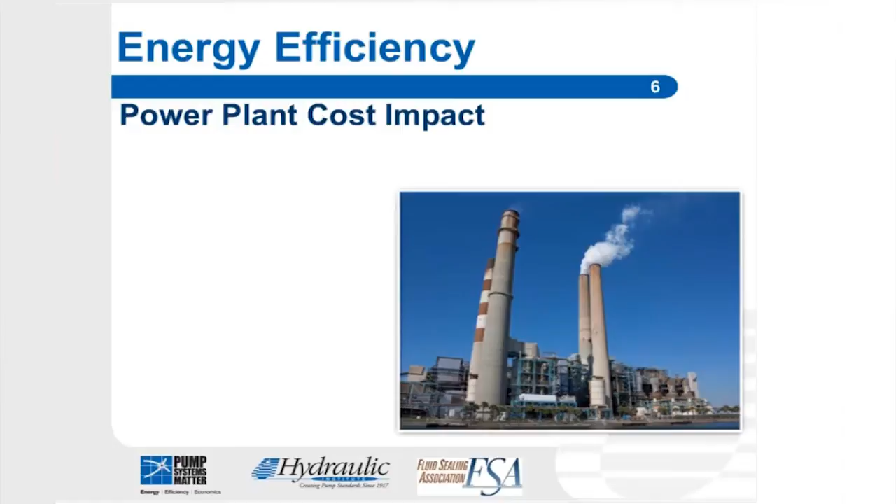In a power plant, most conventional power plants are fired by fuels such as coal, gas, or oil. We burn this fuel to create heat, and in the majority of instances to create steam, to turn turbines and create electricity. So energy can be in the form of heat or thermal energy.

If we look at a typical power plant producing electricity, it uses water in a closed-loop system. The water is at various energy states around that system. So the water could have a high energy state being feed water or steam, or a slightly lower energy state being a condensate. Any of this water in the closed-loop system that has to be replenished has to be heated up.

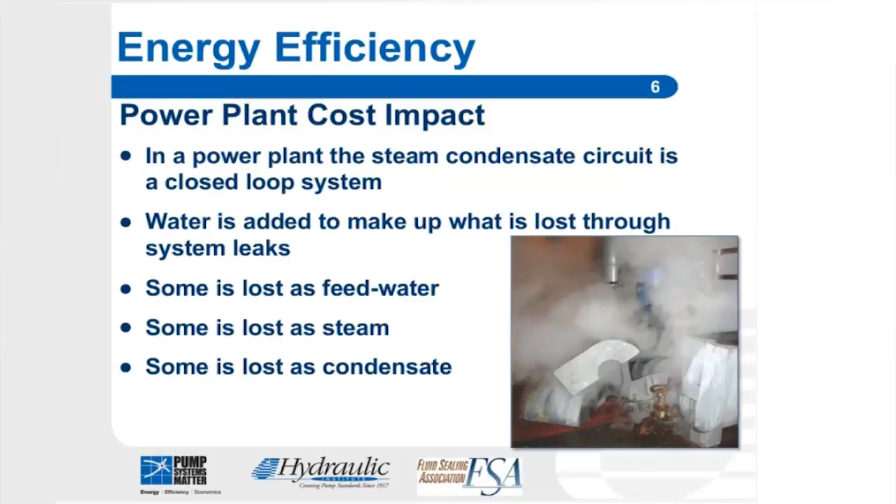So if we're leaking this water with high energy content through valves, valve stems, steam traps, pump seals, or flanges, this will have to be made up in what's known as make-up water. Typically the make-up water would be at a low energy state, a low temperature.

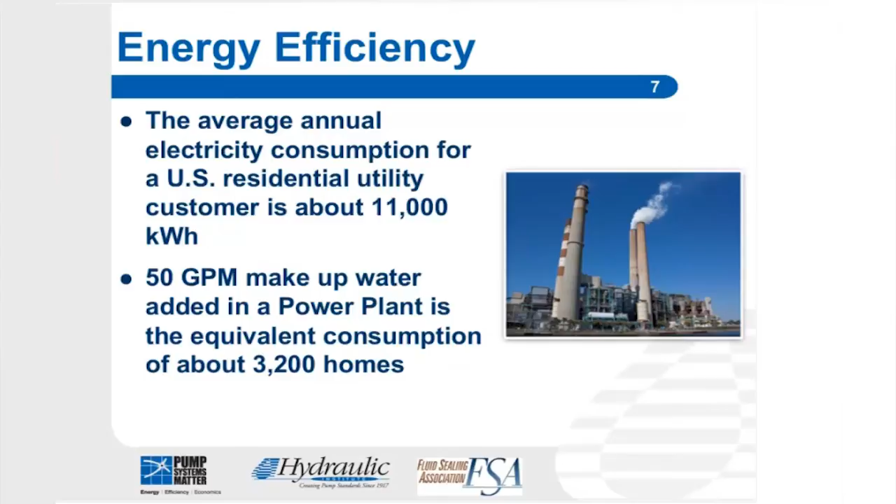There was a calculation done by a friend of mine who's in the Fluid Sealing Association. He made the assumption that if 50 gallons per minute of water is lost throughout that closed-loop circuit, to make up that water and heat it to the same energy state, the equivalent energy requirement would be that of 3,200 homes in North America. So thermal energy has a significant impact on plant efficiency.

Another example I'll state here is an evaporation process. You find evaporation processes in many industries. In the paper industry, lignin is extracted from the wood or lumber and turned into a liquor called black liquor. The black liquor is evaporated to drive off all the moisture content and is then used to fire the boilers, which in turn create the heat for the paper making process.

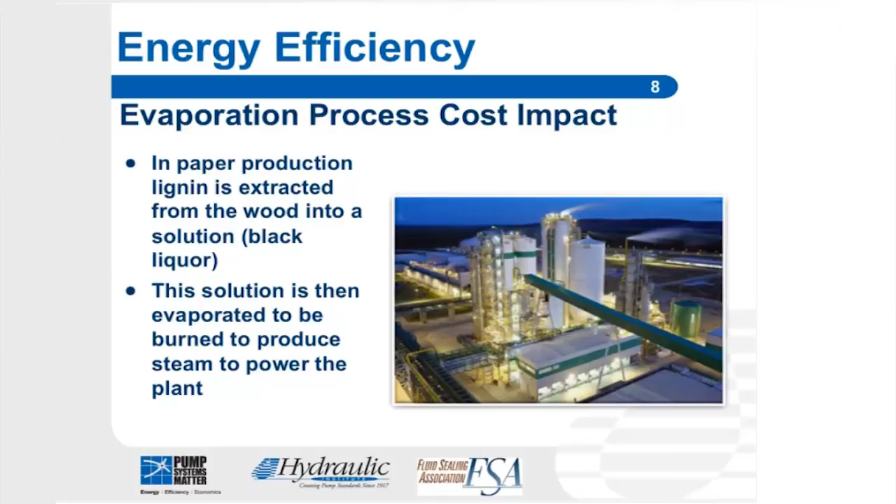Now this black liquor is pumped around, and I'm going to give a very clear example here of where the problems start arising. So I've got an evaporator here where I'm trying to drive off the moisture. I'm applying heat, probably pulling vacuum in the evaporator. And I've got a pump that's pumping liquid, either circulating it or feeding the evaporator, with a seal in here.

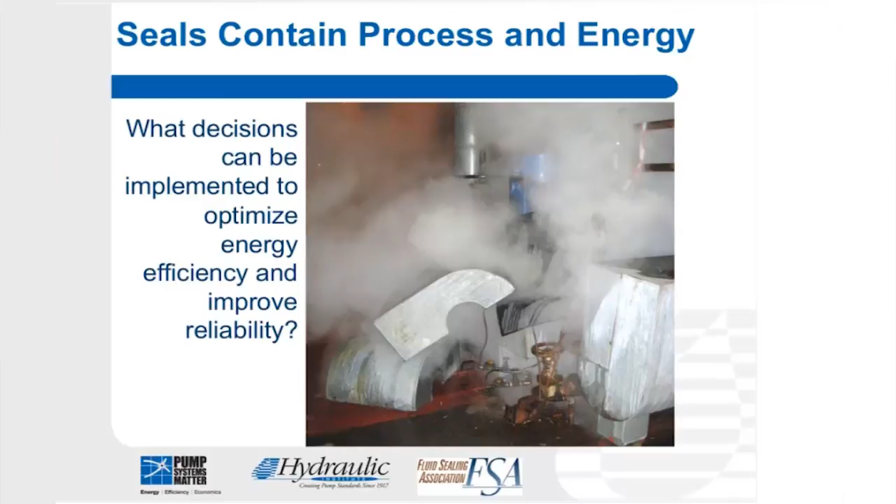If I'm injecting cold, clean water into this evaporator, I'm actually trying to cool down the evaporator. The volume of cold liquid going into that evaporator through the seal flush point here can have a significant impact on evaporator efficiency, which we'll look at further on in this presentation in more detail. So we can make decisions and implement things to optimize energy efficiency and improve reliability by having greater knowledge and improved understanding of the impact of these seal flushes that we use.

I think the concept we need to start coming across in the seal industry - we always talk about sealing the process fluid, be it toxic or expensive. We try to keep it within the system, within the pipework, and stop it leaking out to avoid the cost of waste. But if that liquid is leaking, and the liquid is heated, we're actually sealing the heat energy of the process too. So be it through flanges, valve stems, or pump seals, we must start thinking that seals contain the process, but we're also containing energy within the system.

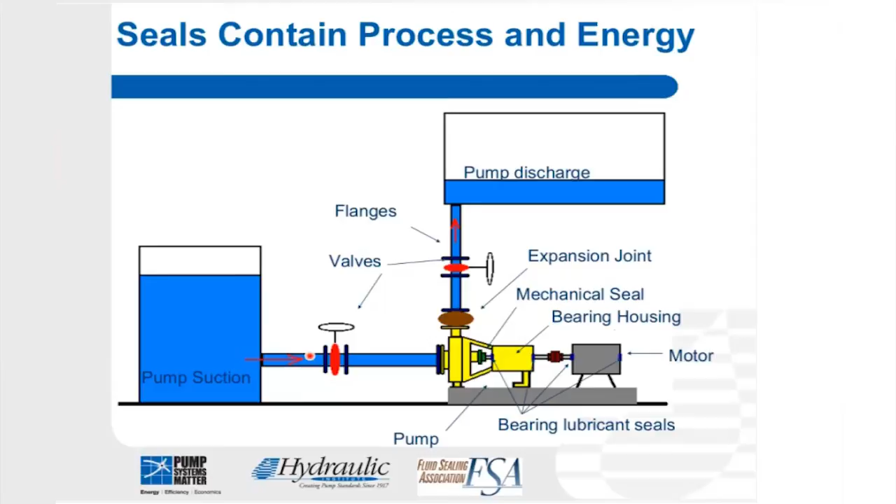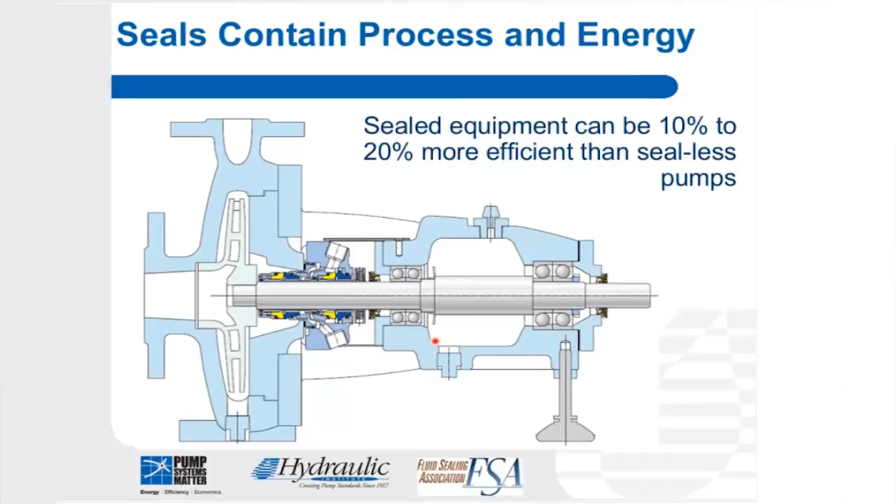There's quite a lot of discussion on shaft sealing and the different methodologies of shaft sealing and what impact that has on the driven power of a pump, and certainly coupled pumps using some sealing mechanism are more efficient than sealless pumps that have losses through the magnetic coupling. There's a lot of discussion in the industry about optimization of pump hydraulics and variable speed drives and other improvements. However, the thermal inefficiencies of some sealing systems and some sealing flush plans can far exceed the energy savings from hydraulic optimization.

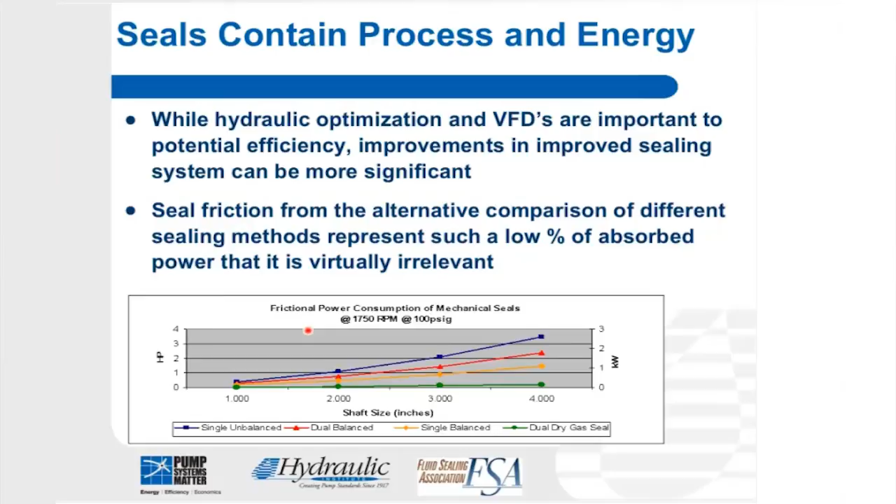But when you walk around the offices, you are bombarded with posters asking all the employees to save energy, turning off their laptops at night or turning off their phone chargers at night. In the grand scheme of things, the futility of turning off those small apparatus is nothing in comparison to the thermal inefficiencies that you find in process plants around the world.

The focus area I'm talking about is on the thermal inefficiency of a seal flush or a seal piping plan or a seal auxiliary system, or whatever we want to call it. The frictional power consumption of a seal is relatively low in comparison.

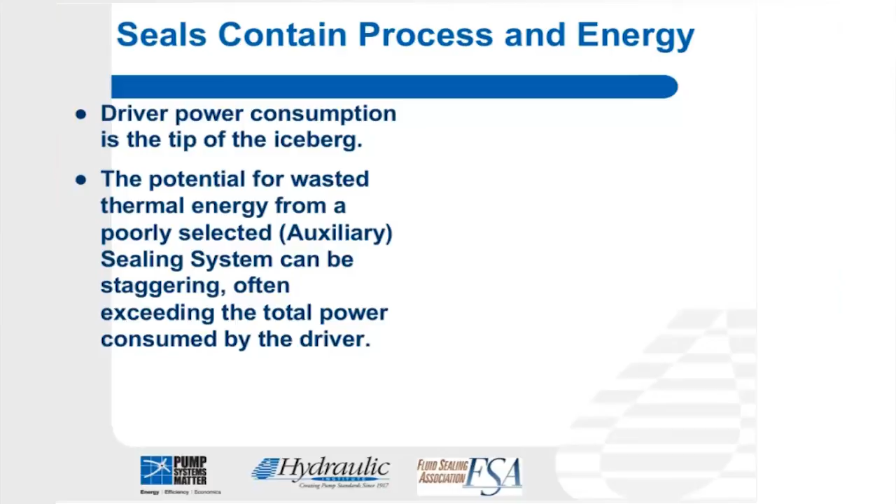I'm going to make an analogy here with, that's a European car, a French vehicle, and in Europe it was the first vehicle meant to exceed 1,000 horsepower and travel at over 200 miles per hour, a road legal vehicle. If you have a few million dollars, you can go out and buy one of these things. Now, when the manufacturers claimed it was 1,000 horsepower, of course they were talking about metric horsepower, which is not the same as brake horsepower, but of course it's French, so we have to work in metric. And the claim that it's a 1,000 horsepower vehicle is not quite correct.

The actual engine within that vehicle produced over 4,000 horsepower. But what we look at is actually the horsepower that turns the rear wheels, that spins the prop shaft. That is a mere 1,000 horsepower. The other 3,000 horsepower was wasted energy exiting through the muffler, up the exhaust system, and it had something like 10 radiators hanging around this car to cool the engine, the gearboxes, etc. So 3/4 of the power produced by this vehicle is wasted thermal energy, and only 1/4 of the power is actually used to drive the vehicle down the road.

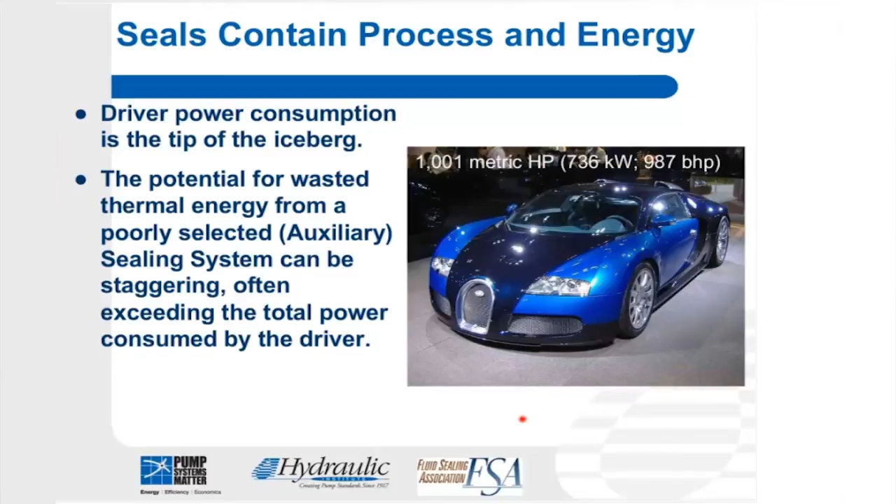So when we have sealing devices in pumping equipment, we use things which we call flush plans or auxiliary sealing systems, or some people might know them as API plans. Why do we use them?

Again, I'm going to use another analogy. In my country, the United Kingdom, we have quite a cold climate, we're at a high latitude, 51 degrees north. Here's a picture of a glass house in London where we grow tropical plants. We can grow them in our harsh climate because we change the environment that they live in, and we keep them in this enclosure, which allows them to flourish.

Now, mechanical seals and sealing systems on pumps are probably the most delicate component on a pump, and they're again like delicate little tropical flowers. We use seal flush plans, or API piping plans, or sealing systems to change the environment that our seals are operating in, and that makes the seals flourish and provide reliable longevity in operation.

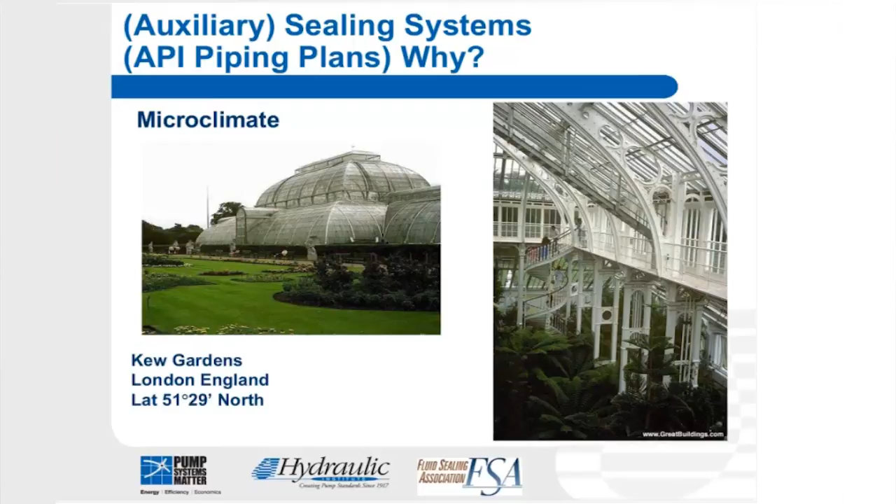So flush plans are normally used to change the environment of a seal. These flush plans are formalized by the American Petroleum Institute in their standard API 682, which is the custodian of the flush plans, drawn in there as standardized formats. If you want to learn more about these flush plans, how they're used and operated, there's an excellent tutorial in a Hydraulic Institute publication, Mechanical Seals for Pumps Application Guidelines, in Chapter 20, a very recommended read for anyone who wants to learn more.

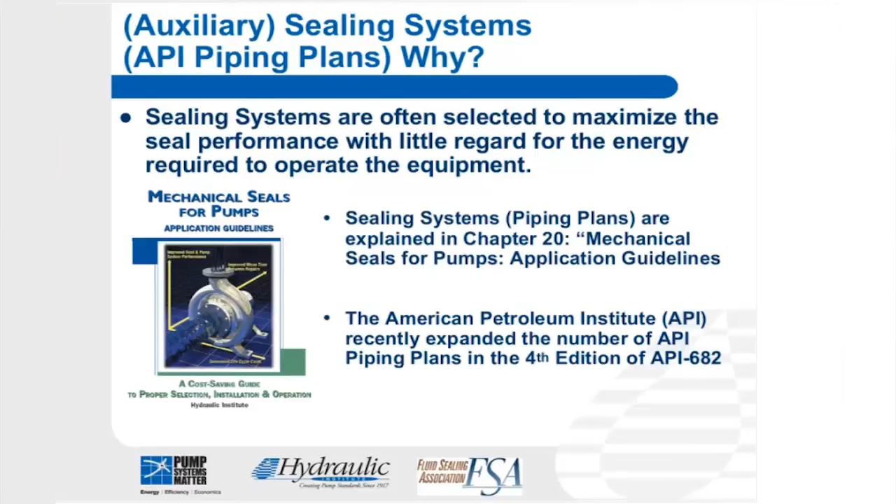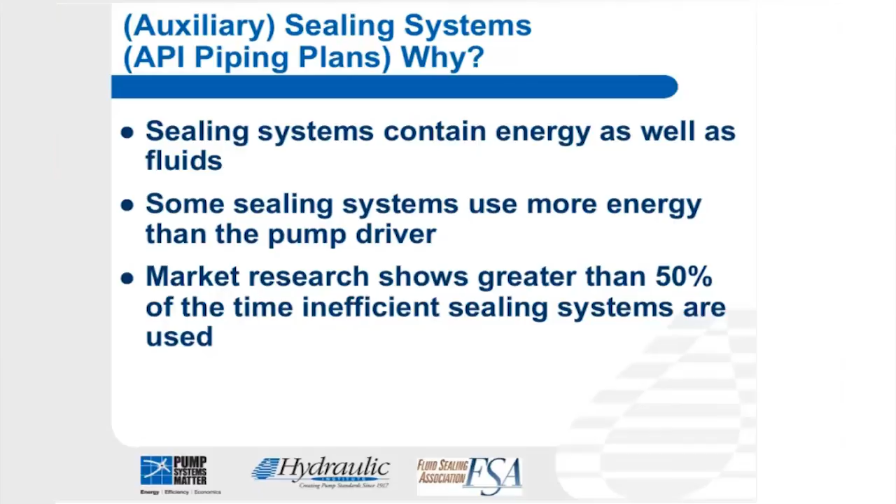Sealing systems contain energy as well as fluids. Some sealing systems will use more energy than the pump driver. Market research carried out by the Fluid Sealing Association has illustrated that inefficient sealing systems are regularly used. Where are these inefficiencies? Where do they come in from? Where do we find them?

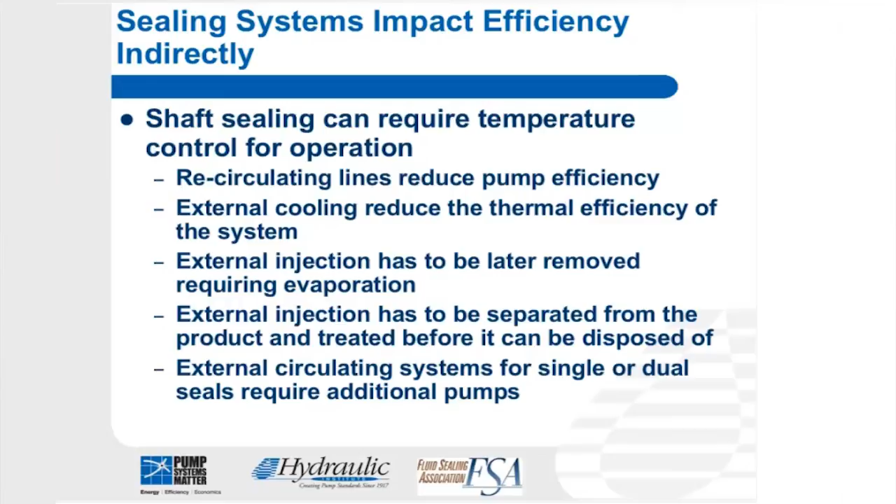If you look at recirculation lines in seal flushes, they can reduce the efficiency of a pump. External cooling can reduce the thermal efficiency of a process. External injection that may have to be later removed by processes such as evaporation can be extremely expensive. Externally injected flush fluids may contaminate the process fluid and have to be separated further downstream and then treated before disposal. External circulating systems for dual seals will require some sort of mechanism to circulate them, maybe pumps. These are all potential inefficiencies that we see with flush plans.

The plans are numbered, as I said earlier, formalized, and the numbering system - don't ask me how to explain the numbering system. It doesn't seem to really follow any logic. But then, flush plans...

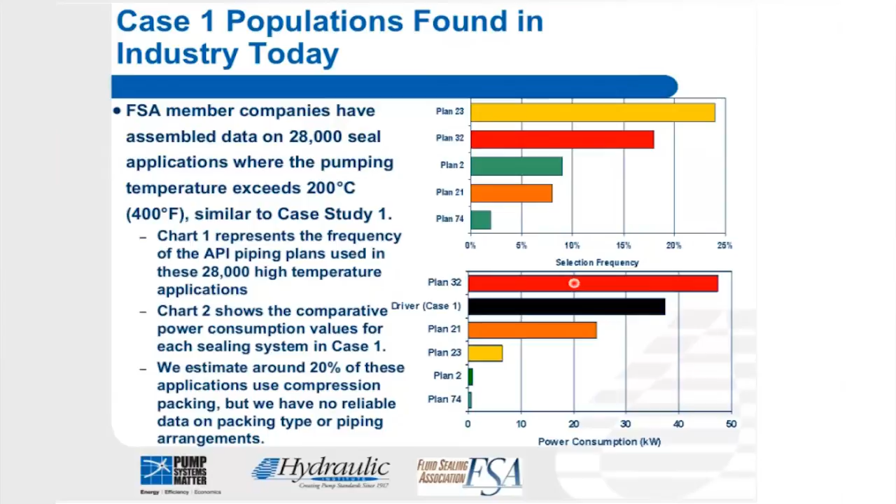So, can we summarize between the API plans which ones are used for single seals, which ones are used for dual seals? These are the questions that, if you want to have an impact, you have to have an understanding of the piping plans.

What do the plans really do? How do they control the environment? Again, knowledge is power here, and reading and understanding the flush plans is critical if you want to make an impact on thermal efficiency or energy efficiency in seal systems.

How many plan options are there? Which ones do we choose? Are there new plans? Have they been adopted? Well, currently API 682 is in its 3rd edition, and there are some 28 current plans. The 4th edition of the standard is imminent, due for publication, and there's an additional 5 plans in the new edition of API 682. So there's over 30 plans to choose from.

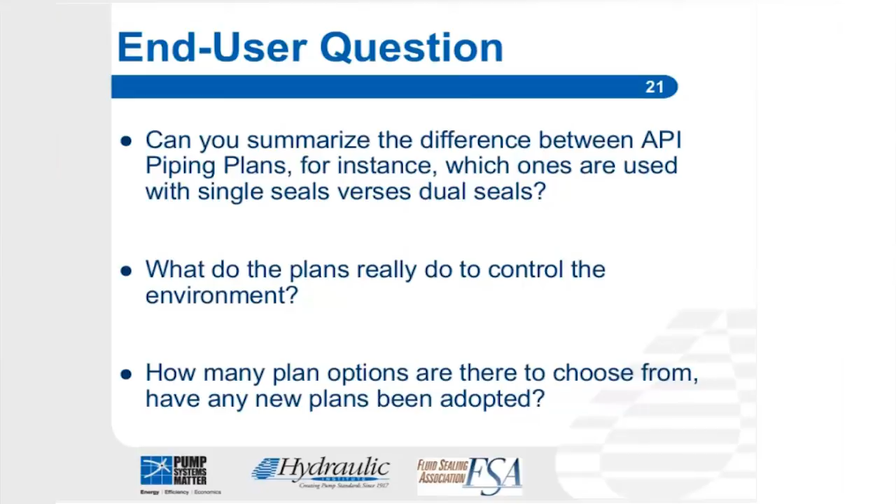We're going to look at some studies of different piping plans. These studies were undertaken by members of the Fluid Sealing Association, and we're going to compare them with a hypothetical case study. The piping plans we're going to look at in detail are Plan 21, Plan 23, Plan 32, Plan 62. We're also going to look at some dual seal piping plans, Plan 53A and Plan 54.

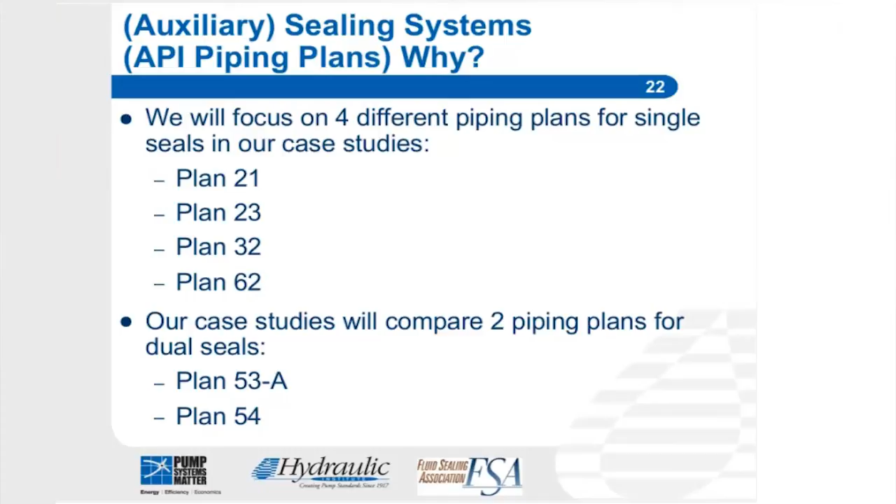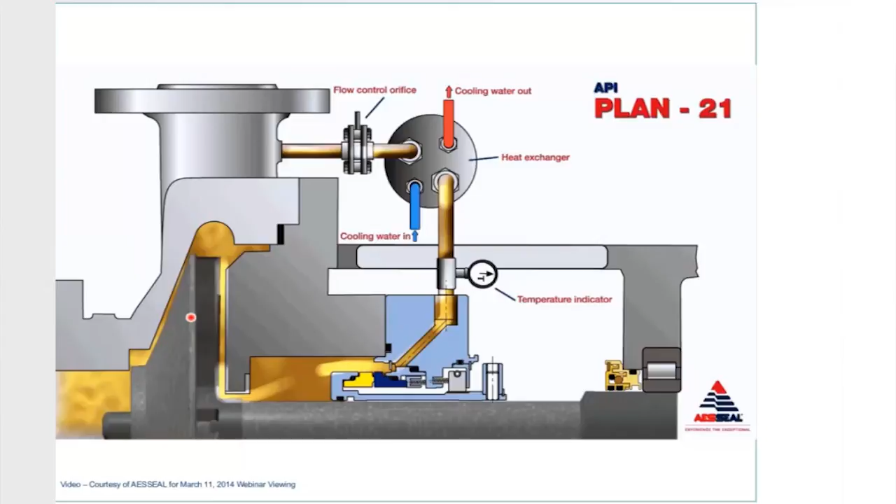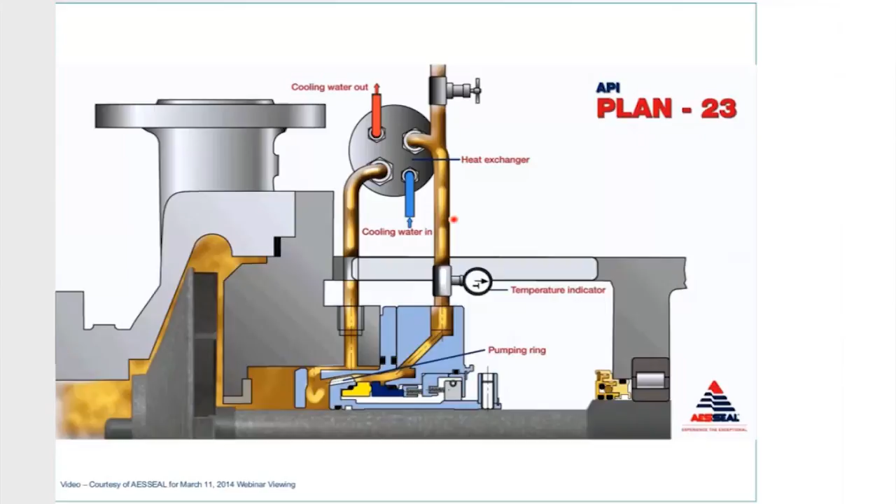By comparison, this is Plan 23, which is a closed loop cooling system. Again, we have our hot process going from suction to discharge on this pump. The seal chamber is closed down by some throat bushing at the neck of the seal chamber. Within the seal chamber, we have a secondary, very small impeller to circulate liquid locally through a cooler or heat exchanger. This Plan 23 is significantly more efficient than Plan 21, because we're only really trying to remove the generated heat from the seal faces and any heat soak through the pump casing, as opposed to Plan 21, where we're trying to cool down the process continuously.

Normally the cold, clean liquid would be significantly cooler than the process fluid, and we're effectively diluting the process with cold liquid, which can have a very significant impact on the thermal efficiency of the process.

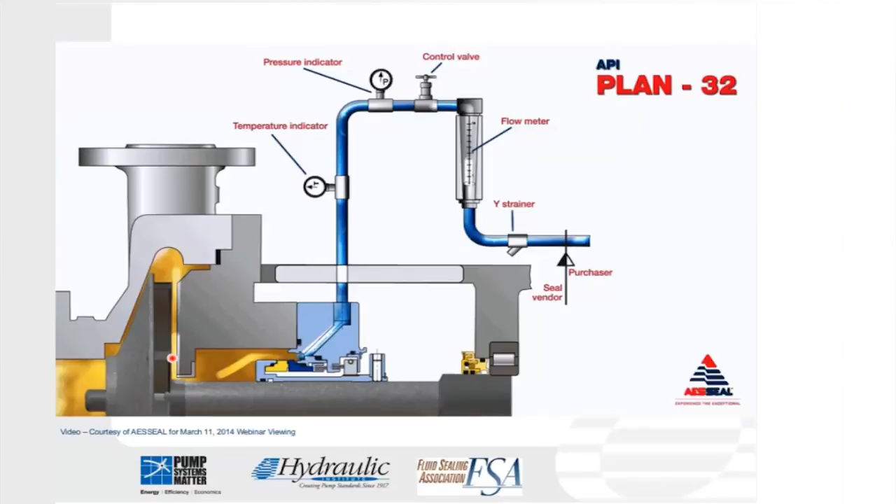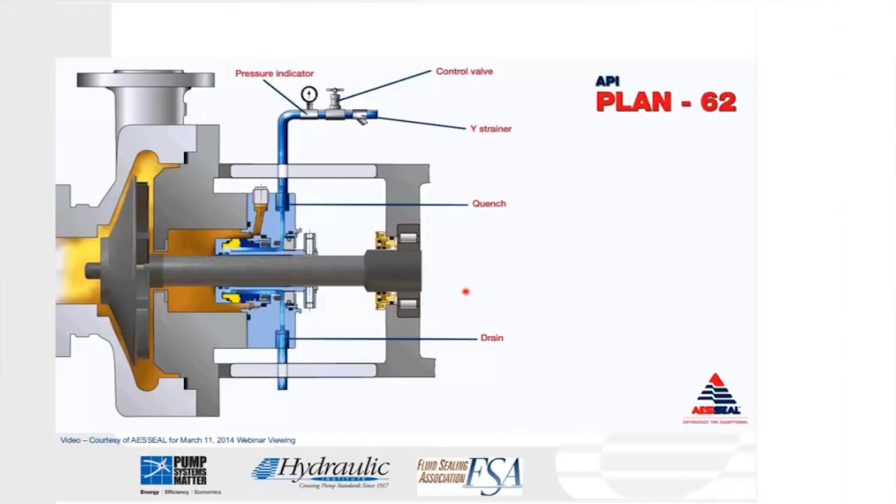Plan 62 is an atmospheric plan commonly used on hot oil type applications for a single seal. What we do with a Plan 62 is take steam across the atmospheric side of the seal and down to some drains system. What the steam does is not really used for cooling. What it's used for is to carry away any hydrocarbon particles that congeal on the atmospheric side of the face, before they start carbonizing and causing the seal faces and the seal to hang up.

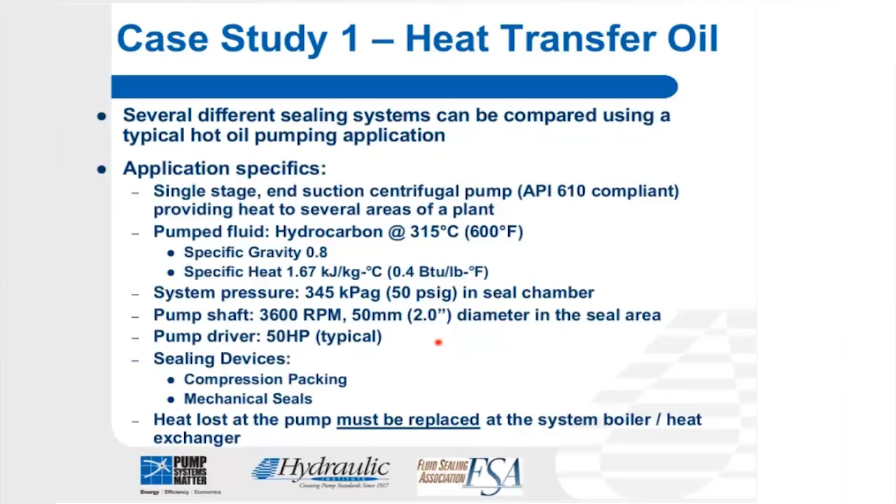The case study I'm going to review is a hypothetical example developed by a member of the Fluid Sealing Association. He's looked at a simple example of an API 610 end suction pump, an OH2 pump. Pump fluid would be at 600 degrees F. We're talking about a heat transfer type oil to circulate heat around a plant, and we're assuming that the seal chamber is at 50 psi and the seal diameter is 2 inches. Typically a pump such as this would use a 50 horsepower motor, which is around 35 kilowatts.

So we look at this example with a Plan 21. As I said before, we're taking the side stream from the process through the cooler and injecting once through the cooler, back to the process. Because we're cooling the process continuously, the heat load is very significant on the cooler. The only thing controlling the flow is the orifice plate, and if we do a simple orifice plate calculation across the pump, typically you see between 2 and 3 gallons per minute of flow rate through the cooler.

The cooler works very hard, and in this particular example, the cooler is removing 37 kilowatts of heat, or 127,000 BTUs per hour of heat from the process, as opposed to the friction value of the seal, which is a few hundred watts. So a very significant load on the cooler.

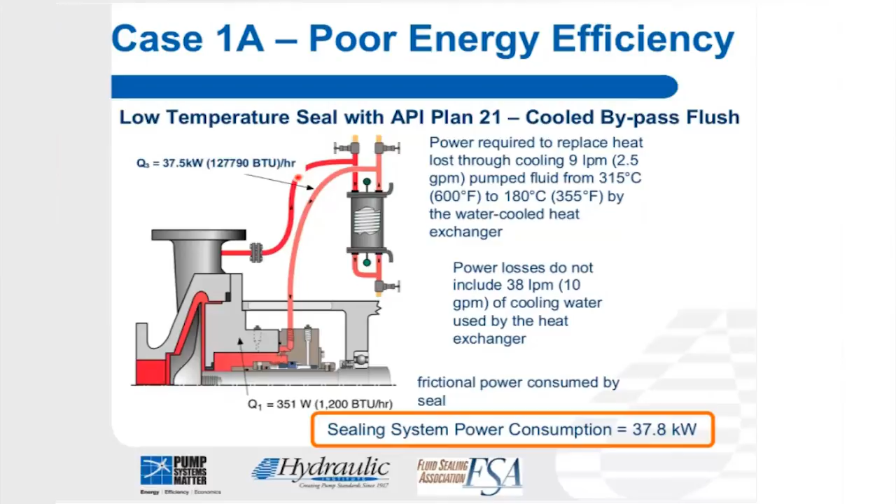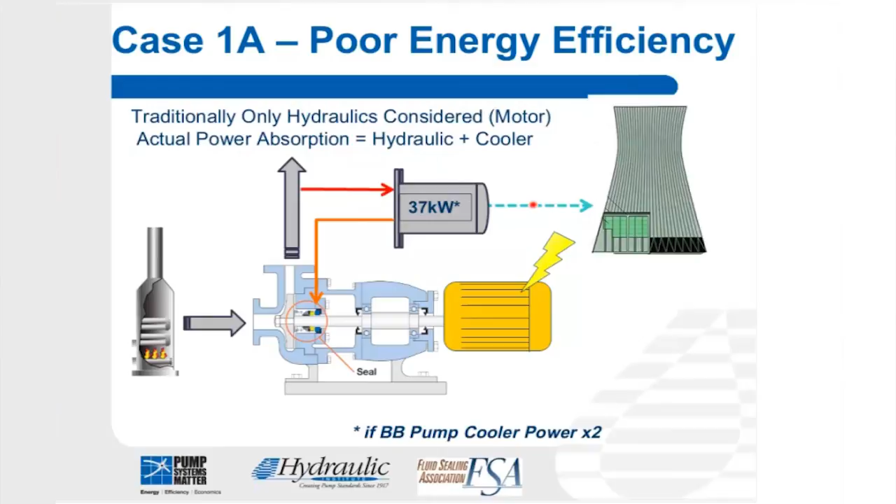I'm just going to illustrate this schematic here because this really does illustrate what's going on. So we've got side stream going through a cooler, and I've got over 30 kilowatts of heat being sucked out the process and taken away to the cooling towers and to atmosphere. So a hot process here, we're trying to put heat in, and we're stripping out 37 kilowatts of heat and throwing it away to the atmosphere. In this particular example, the heat load on the seal cooler is more energy than the pump driver, the electric motor driving the pump.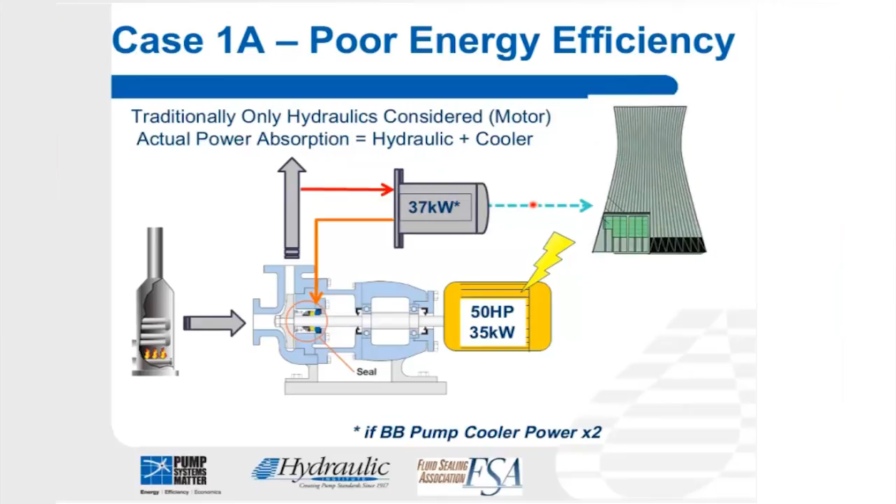The next example I'm going to look at is the Plan 32, where we're injecting a cold clean flush into the process fluid, into the stuffing box or the seal chamber, and a constant loss. So if we've got 600 degrees F of process temperature here, and we're putting a cold, say for example kerosene in at 100 F, we're cooling down the process. So somewhere in the process we're applying heat to compensate for this cold liquid that we're injecting.

I'm going to give an example here of what we're actually doing. If you're sitting in your bath at home, and you've filled it up with hot water, this system here is like having the cold tap continuously running into your hot bath. Very quickly your bath loses temperature, and you're continually having to apply heat energy from your hot tap to constantly compensate for this constant loss, this trickle of cold liquid into your hot bath.

The energy to heat up 2 gallons per minute of kerosene from 100 degrees F to the full process temperature would be in the region of 47 kilowatts or 160,000 BTU hours. So a very significant energy requirement indeed.

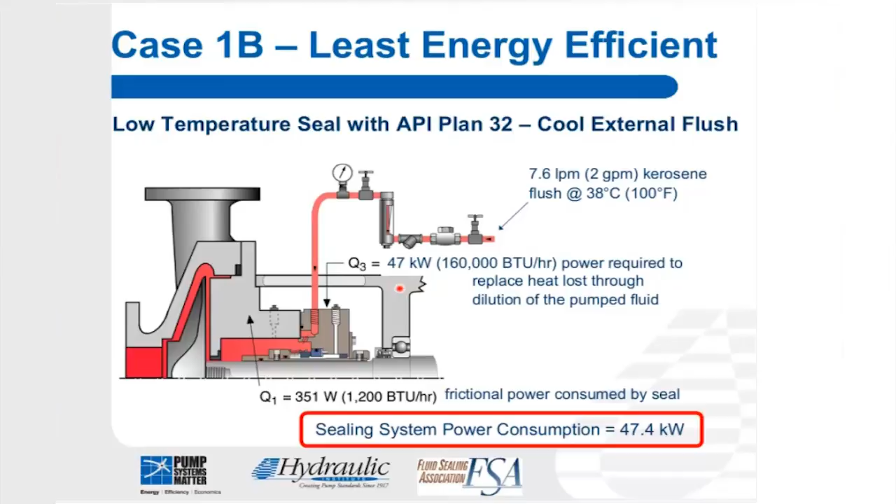Plan 23 is a more efficient piping plan. We've got a closed loop circuit here, and we're only dissipating the heat that's generated at the seal faces and the heat soak through the seal chamber casing and the seal gland plate. The consequence of this is that the cooler is operating at a significantly lower duty, probably in the region of 1.7 kilowatts of heat being dissipated through the cooler. The result of this plan as well is that the seal chamber temperature is significantly reduced over the Plan 21, the first slide that I showed you in this sequence.

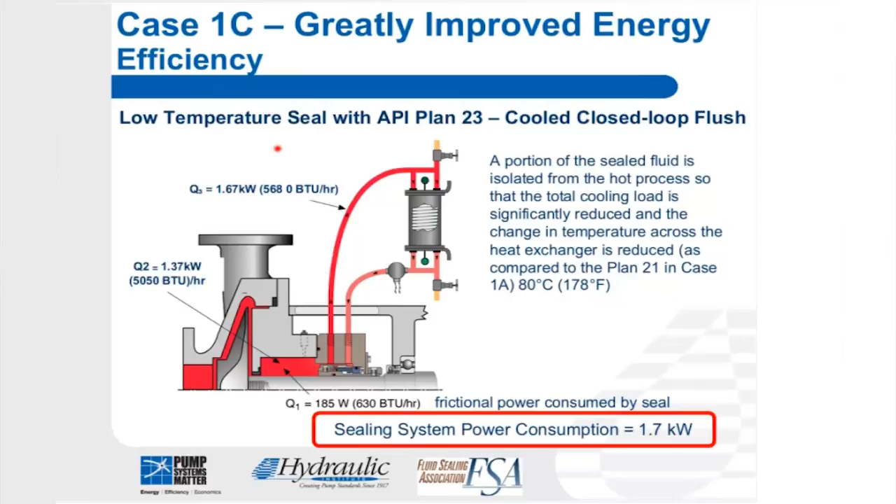If we look at the steam quench, which is potentially quite an energy efficient way of sealing a hot oil pump, we've got our hot oil pump here at 600F. In a steam quench, we're not really removing much heat with the steam, so we have to use something like a bellows seal with graphite that can accept the full process temperature. The steam is there just to prevent coking on the atmospheric side of the seal. Now, how much steam is required?

A whisper of steam is all that is required to make this system work well, and a whisper of steam does not consume a lot of energy, less than a kilowatt. However, controlling the steam flow on a steam quench seal is not easily done, and this type of seal and system is very commonly used in refinery service.

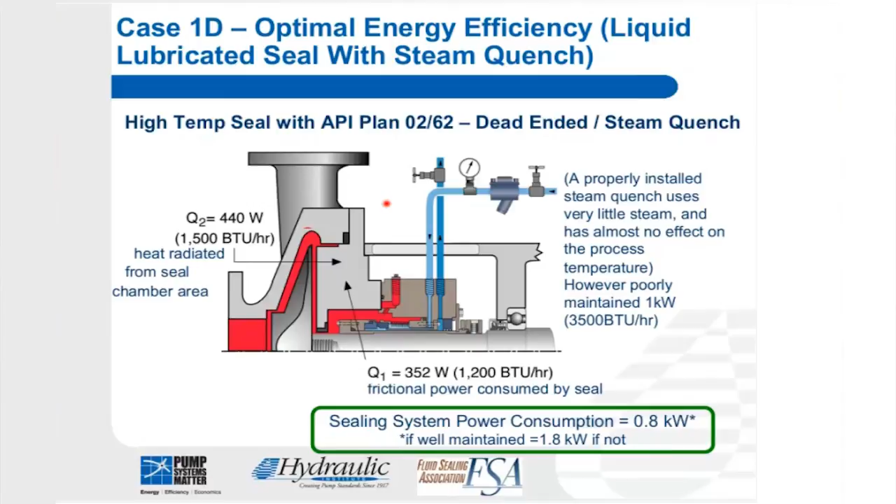You often see pumps with the steam quench blasting outside the atmospheric side of the seal. When steam is uncontrolled like this, the energy usage goes through the roof. Something like 1 pound of steam per hour is 0.3 kilowatts, or 1,000 BTU.

There are methods of controlling the steam, but poor operating practice is typically a cause for concern on steam consumption on this type of piping plan.

Out of interest, this plant I took this photograph in France. This was a refinery in France that had loads of operational issues. I surveyed the plant, was looking at the steam quenches, and found numerous pumps with steam Plan 62 steam quench leakage, very high levels of leakage rate. The consequence was that the plant was actually shut because it was inefficient, and it closed. I'm sure all the bad operating practices, not just this, were contributors to the plant's poor profitability and sad closure.

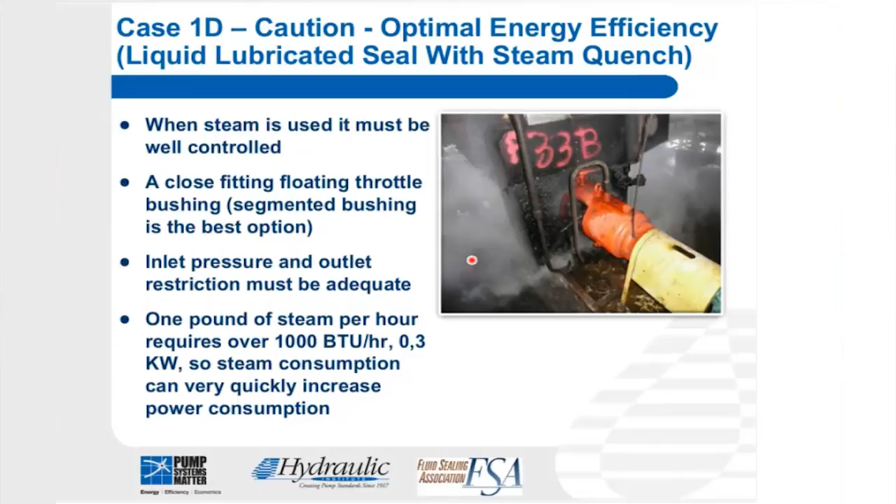Another option would be to use a gas seal, a Plan 74, which generally uses a nitrogen flow to a dual seal, and the seals run on the nitrogen rather than the process fluid. There is some leakage of nitrogen to the process, and clearly the seal would have to tolerate the full process temperature, as the gas itself does not really remove any heat. But this is potentially the lowest energy, the most energy efficient piping plan for sealing hot services.

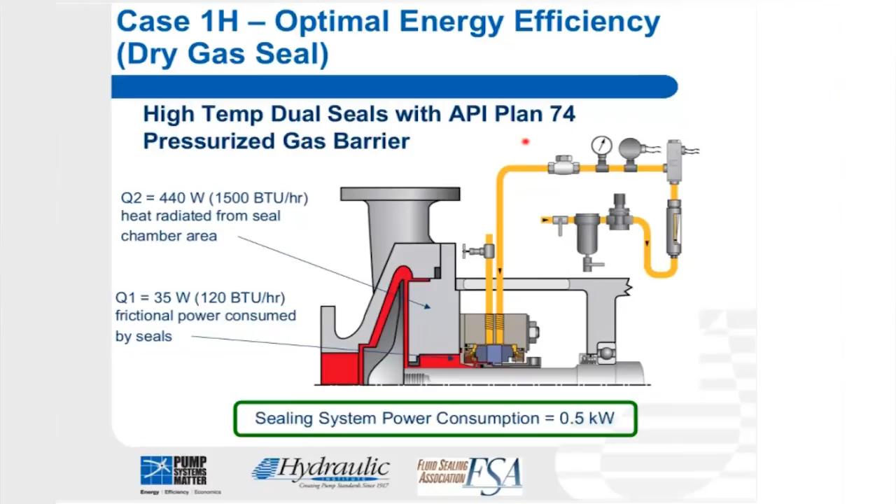One does have to consider the nitrogen leakage to the process, and also the energy cost in producing nitrogen in the first place. Here's a better illustration of how Plan 74 works: fundamentally, nitrogen gas is at a higher pressure than the seal chamber, going through controls and flow meters into the interspace between a dual seal, and the seals run on nitrogen.

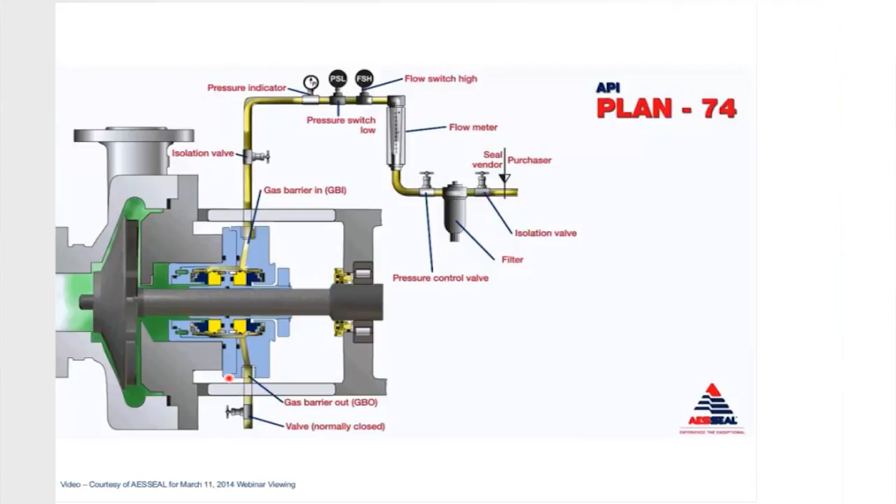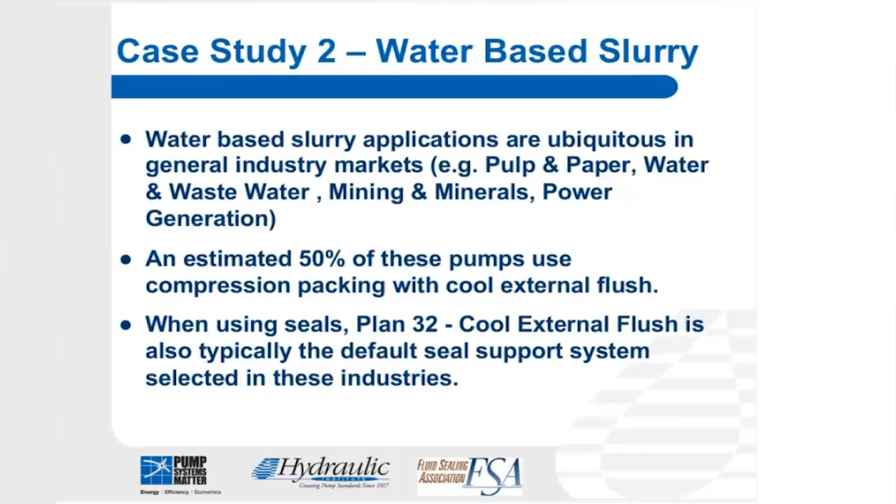The next item I'm going to look at is another case study, this time on water-based slurry type applications. Water-based slurries are common in pulp and paper, wet corn and milling processes, sugar processes, wastewater treatment, mining, mineral and power generation. The default option for these applications is Plan 32, clean water injection, which is very commonly used in this industry sector.

I'm going to look at an evaporation plant. You find evaporation plants in the ethanol industry, where the fermented mixture byproduct goes to an evaporator plant where the water is driven off and the solids are used as cattle feed. Or you'd have a similar process in the paper industry with black liquor sealing, where we're trying to dry the water off and use the black liquor to fire the boilers. So quite a common application.

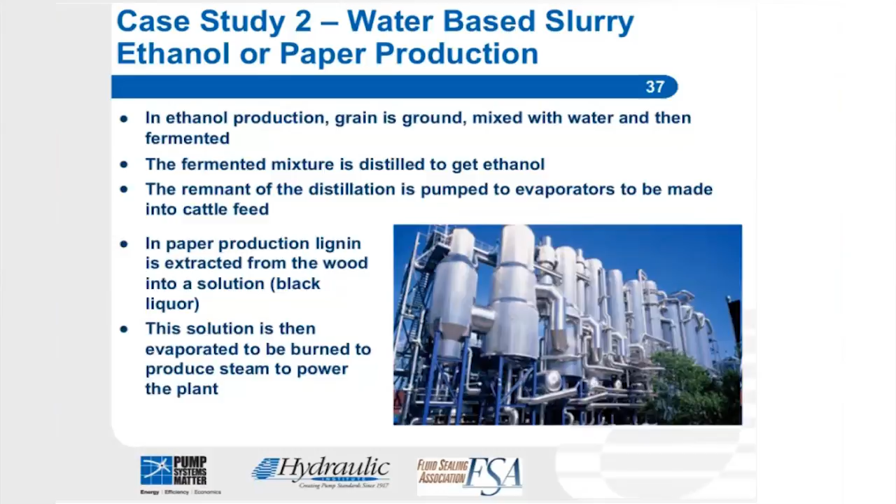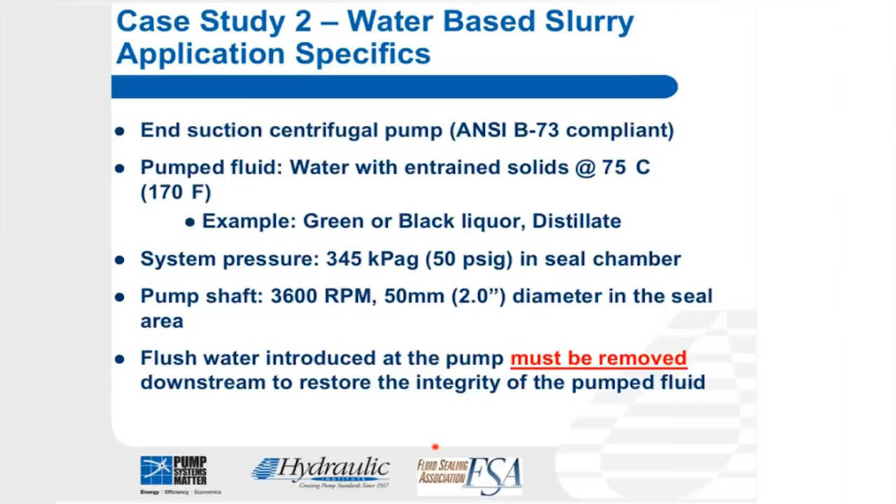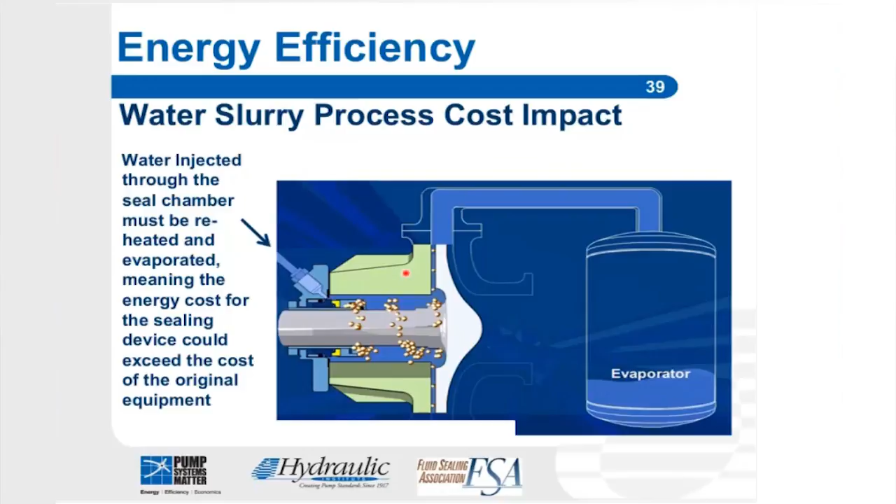If we look at a pump, here we've got an ANSI type pump, ANSI B73 compliant. The water slurry is at 75 degrees C, a 2-inch seal, 3600 RPM, and 50 psi in the seal chamber. The schematic shows a Plan 32 cold water injection directly into the seal chamber, cooling down the process fluid, and that cold water has to be driven off in the evaporation process downstream. The energy impact of that is very significant indeed.

If we've got 6 litres of flush fluid at 50F, and our process fluid is being cooled down by this flush fluid, the heat energy that needs to be applied to warm that liquid back up to process temperature and then evaporate it is in the region of 260 kilowatts.

So a massive energy impact that this type of piping plan or flush system has on an evaporator process. I did a survey in a plant in Scotland over a decade ago.

Now in Scotland they don't make ethanol, they make a very similar product in evaporator plants called Scotch whiskey. Very similar to ethanol production, except the end product is significantly more expensive. I did a survey of some evaporator plants and concluded that the Plan 32 was having a dramatic impact on the evaporator process.

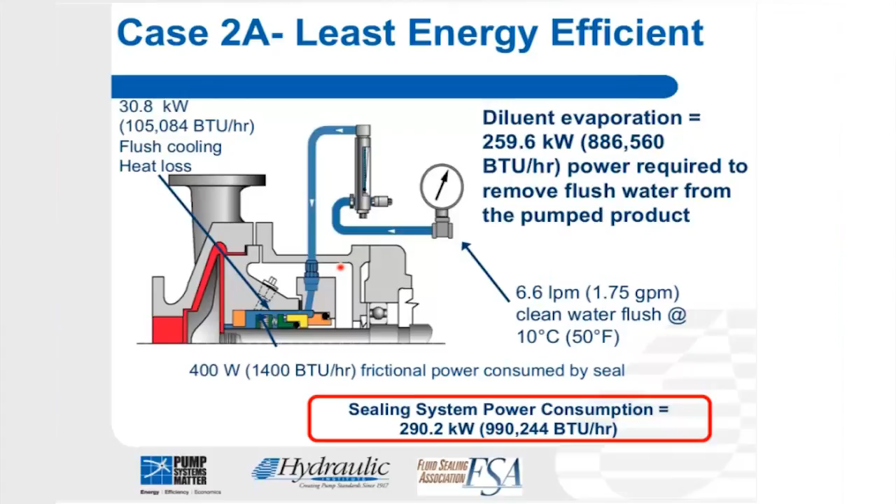But the other thing Scotsmen are very renowned for is being very careful about spending money. In this particular plant, the Scottish engineer was reluctant to spend money to change his flush system and sealing device. So eventually we persuaded him to take a seal and sealing system on loan for 6 months, and he would pay for it at the end. Within 12 hours of installation, the engineer was on the phone saying they had a 10% increase in evaporator efficiency, and they wanted to convert all the other pumps within the evaporator plant. So a very significant impact that Plan 32 will have on evaporators.

Alternates for this type of sealing include using a dual seal. Dual seals run on a barrier fluid that is a clean fluid - we're not running on the process fluid, but a pressurized barrier fluid. A Plan 54 is quite commonly used, and the barrier fluid is circulated by an external pumping device.

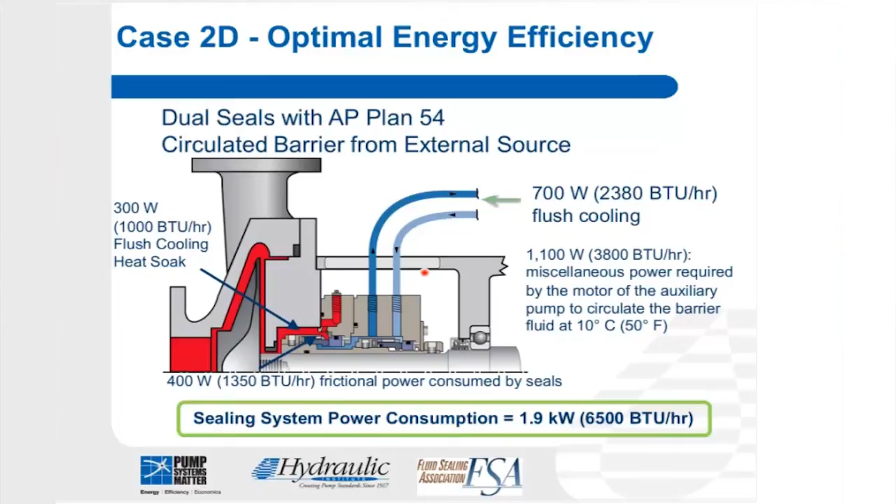The power consumption would be in the region of about 2 kilowatts, and a lot of this is from the device used to circulate the barrier fluid. So here we can see a small pumping device used to circulate the barrier fluid through a seal, back to the tank, and back through the seal again. It's quite an energy efficient way of doing it, but you have the complexity of some sort of circulating system.

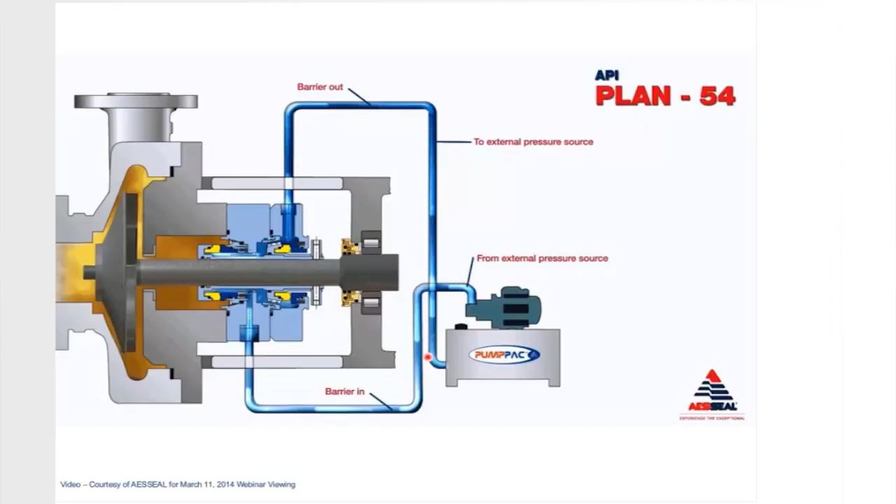Another way to do it is to use a Plan 53, a very simple system. Instead of having an external pump, we put a little circulating pump within the seal itself that circulates through a pressurized tank system, backwards and forwards to the seal.

The heat load on this seal is a little bit of heat soak, heat transfer through the casing of the pump, through the gland plate of the seal, and also the generated seal heat from the two seal faces. So typically this system would require around 1 kilowatt of sealing power.

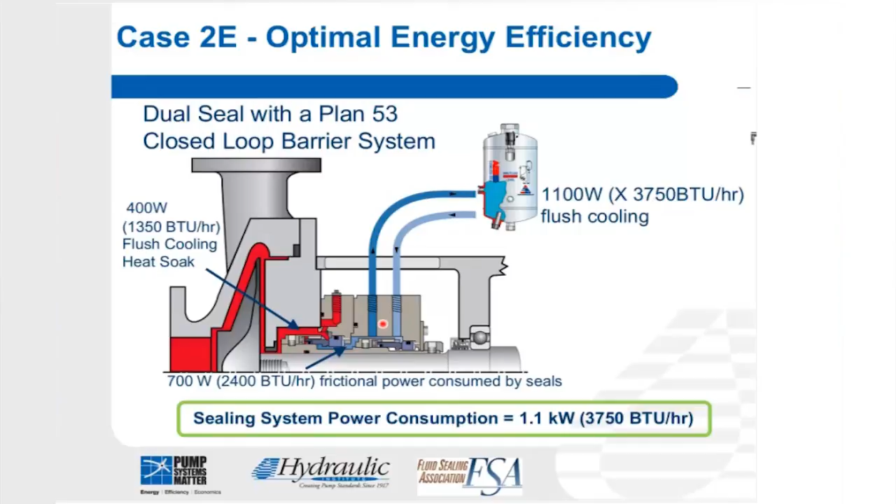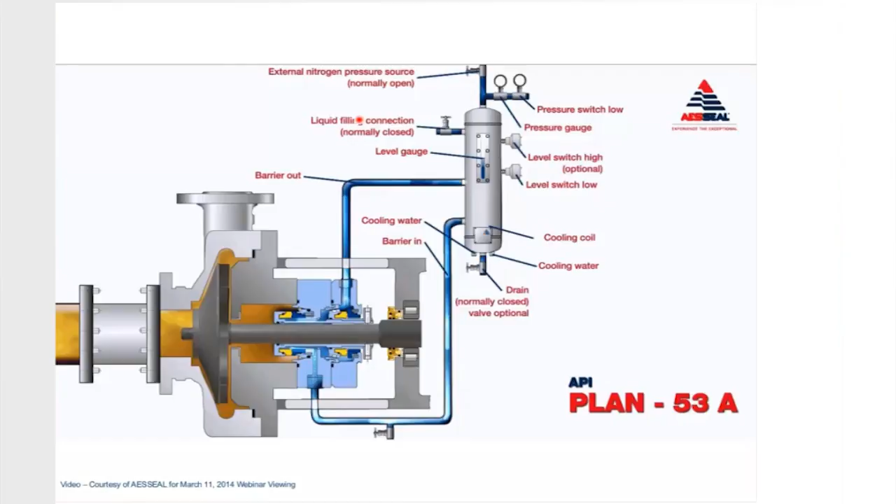Another way of handling a water slurry would be to use a dead-ended seal with no flush plan at all. The friction of the seal would be the only power absorbed in this system. However, if you're pumping a hot sticky liquid such as black liquor or a sugar syrup or something similar, the reliability of the seal would be compromised.

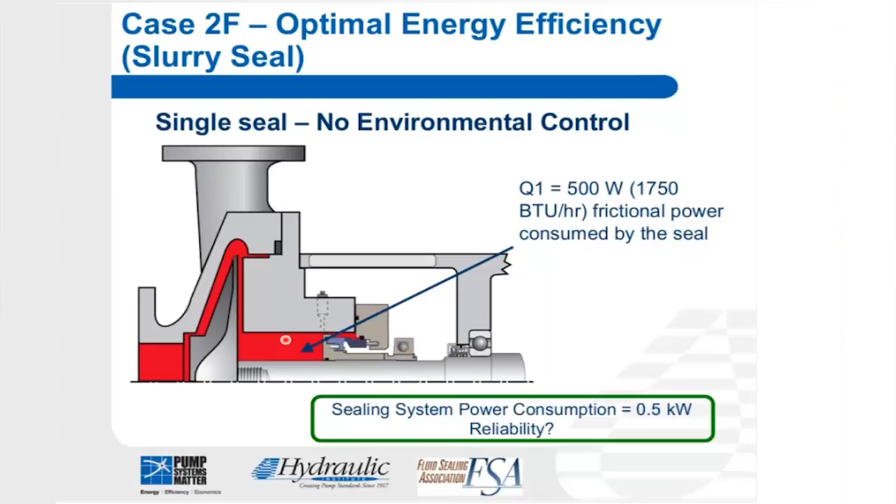What you're sealing between the seal faces is the process fluid. Those process fluids would tend to congeal on the atmospheric side of the seal, and that might have a negative impact on reliability.

So in conclusion to this presentation, potentially sealing system savings can exceed the energy savings from switching to things like variable speed drives or improving pump hydraulics. Selection of inappropriate sealing systems can have very significant impact on the thermal efficiency of plant and plant utilities.

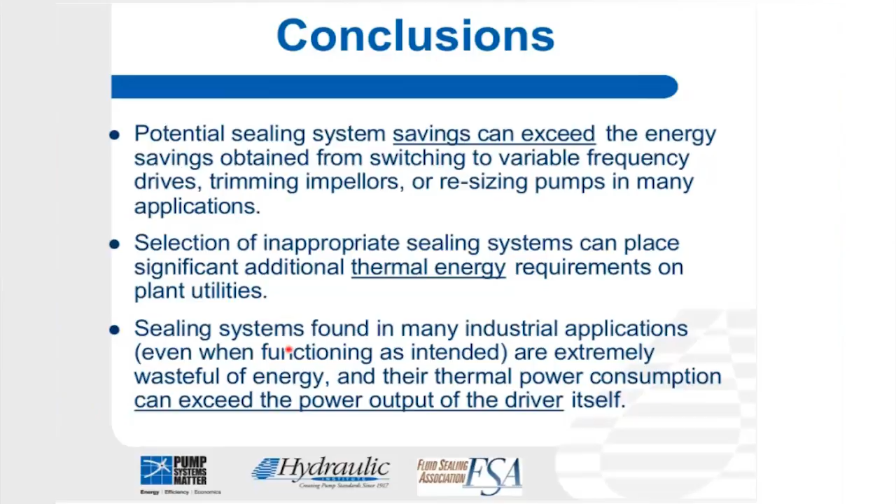Sealing systems found in many industrial applications are extremely wasteful of energy, and as I said before, the power consumption can exceed the power required to drive the pump. The sealing industry has technologies that can overcome some of this energy wastage, and there's increasing publicity about some solutions.

The Fluid Sealing Association has conducted a survey, and it illustrates some of the frequent energy wasting seal systems on the marketplace. The Fluid Sealing Association also has a return on investment calculator on its website that you can use to calculate some of the energy requirements within fluid sealing systems to assist in decision making.

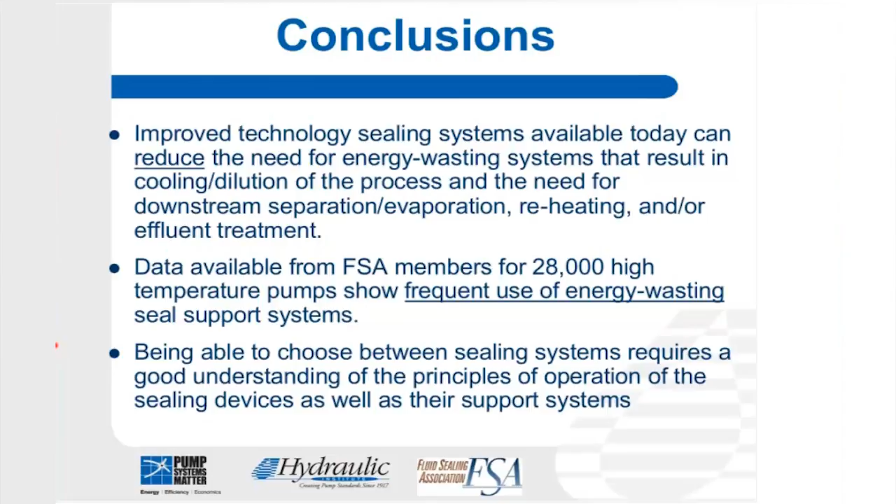Being able to choose between different sealing systems or flush plans requires a very good understanding of the principles of their operation, why they are used, and also a good understanding of the process that surrounds the seals. So that concludes the presentation.

There is a quarter of an hour left for anyone to ask questions if they have some.

I've got a question that someone's written in. It's about the steam quench, asking if there's any negative impact from a high level of steam or a high mass flow rate of steam, other than thermal inefficiency. Probably not. If there's a high flow rate of steam to the atmospheric side of the seal, I can't really see there's a negative impact apart from the wasted heat. If it's an extremely high flow rate, you might find that the flow of the steam under the steam baffle could upset the balance of the bellows mechanism operating in there, just from the pure velocity of the steam passing under the bellows. But I can't really see any other negative impacts apart from the pure waste of heat going to atmosphere.

There's a note here asking what is the capacity of the power plant that I used in an earlier slide. The answer is I don't know. That illustration came from a colleague of mine at the Fluid Sealing Association, and he just used it as a typical example. Whatever a typical capacity is in the USA, I don't know, but perhaps I can try and find out the answer after this session.